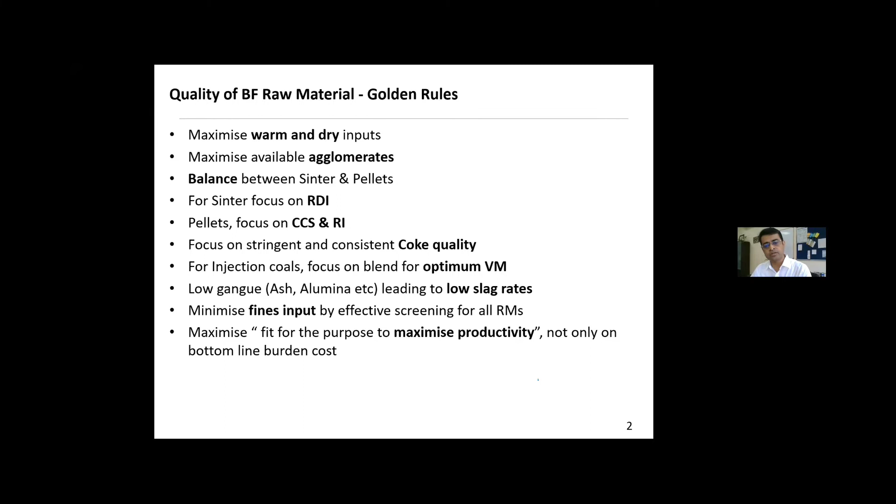For high driving blast furnaces, the raw material quality, especially the sinter RDI, the pellet strength, and the coke properties have to be very stringent and very consistent. We should all work on the gangue and fundamentally on fines reduction in the input to the blast furnaces.

The blast furnace requires the prepared burden to improve the productivity, and blast furnace needs a prepared burden to make the customer happy with lower hot metal silicon. So the overall verdict is very clear and loud that we, the iron makers, must see and listen and respond to the call. Else, we are out of the bunch.

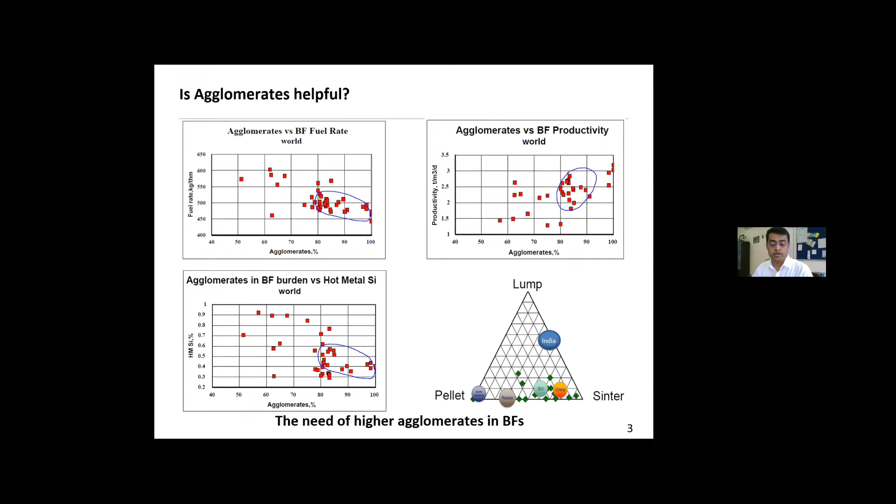If you see the triangle on the right hand corner, most of our Indian blast furnaces are on that blue dot. And most of the European and so-called the big blast furnaces, high efficient blast furnaces, are on the bottom below, where they are having a very minimal lumps and with a combination of pellets and sinter. So this is not good for the company, not good for India, and not a sustainable operation. So what next?

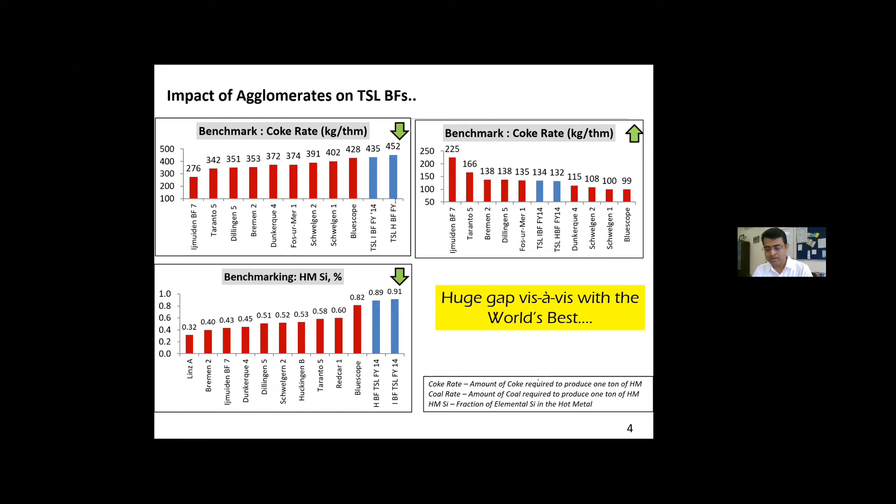It is not that their technology was superior, but that just the right mix of input material was not there with us to deliver the high energy efficiency, the productivity, and the quality that is required as of now. Coupled with operational excellence and with increase in agglomerates, all the three productivity levers, efficiency, and the quality parameters moved in the right direction. Just please have a note that none of the mentioned benchmark blast furnaces were operating with high alumina load like the Indian blast furnaces.

If you see the performance of the Indian blast furnaces or Tata Steel H and I furnaces, they are moving along with the bandwagon, a significant achievement with this adverse Indian raw material because of the alumina part. Just to mention, all these parameters are basically yearly best. But if you talk about the monthly best, one of the blast furnaces with us has reached a sub-300 coke rate, around 296. The coal injection, they have broken the barrier of 200. They have reached 221. And silica in the hot metal has dropped to less than 0.6, roughly 0.557.

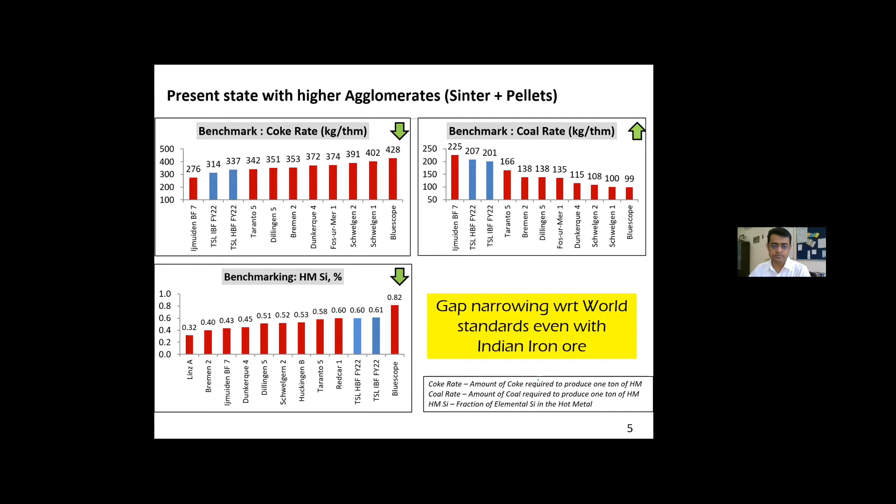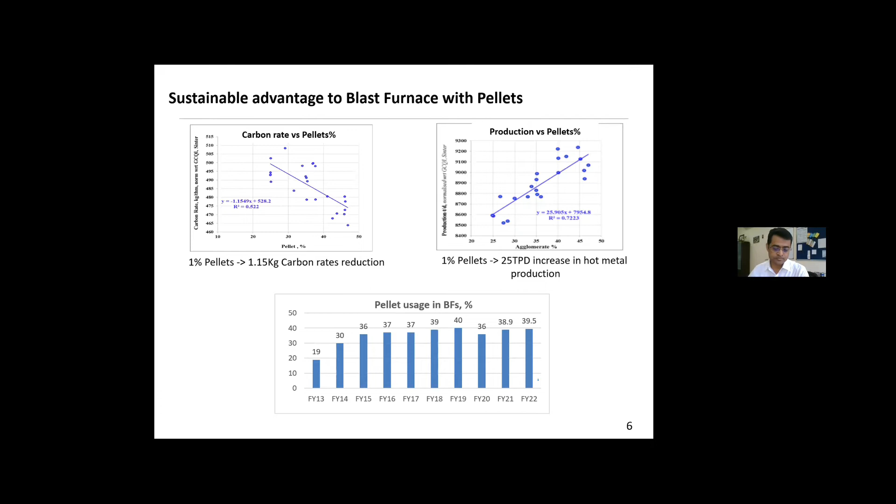Going further, we also have to think about how to digitize our own process. Because gone are the days of smaller pellet plants and variability in quality. With the very high running rates of blast furnaces, they require a very consistent quality and higher volumes. Therefore, the man dependency has to be moved into a corner where digitalization takes over the whole operations. So we at Tata Steel initiated the digital twin, where the entire pellet process from the raw material to the screening process is digitally mapped.

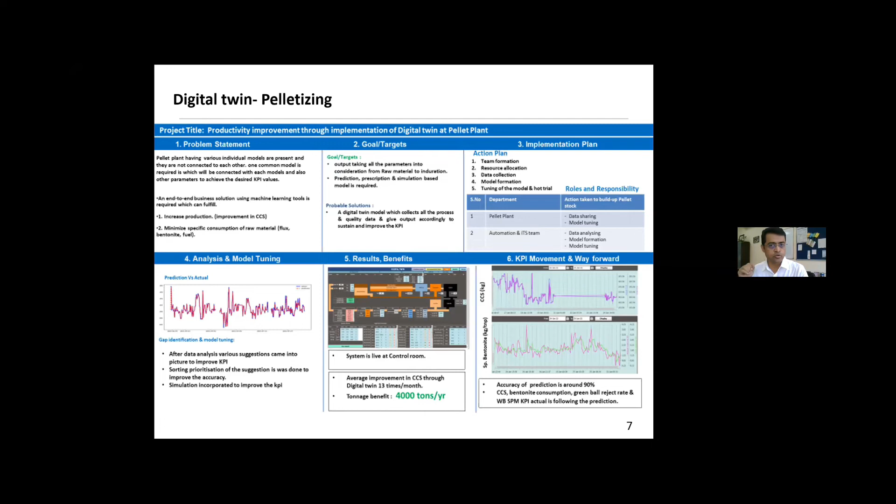You can also play with it to understand if you tweak one parameter, what will be the final effect on the quality. If you change the overall fuel rate, if you change the pressure, what will be the final output in the quality and the productivity. This is helping us a lot in stabilizing the quality, maximizing the productivity, and the blast furnace is also loving it.

Along with that, we say that the green pelletization or the green pellet making is a matter of art, but art varies from person to person, and the blast furnaces don't like it. So we try to do an auto operation of the green pelletization, so that we fundamentally ensure the repeatability of operations and consistency in quality.

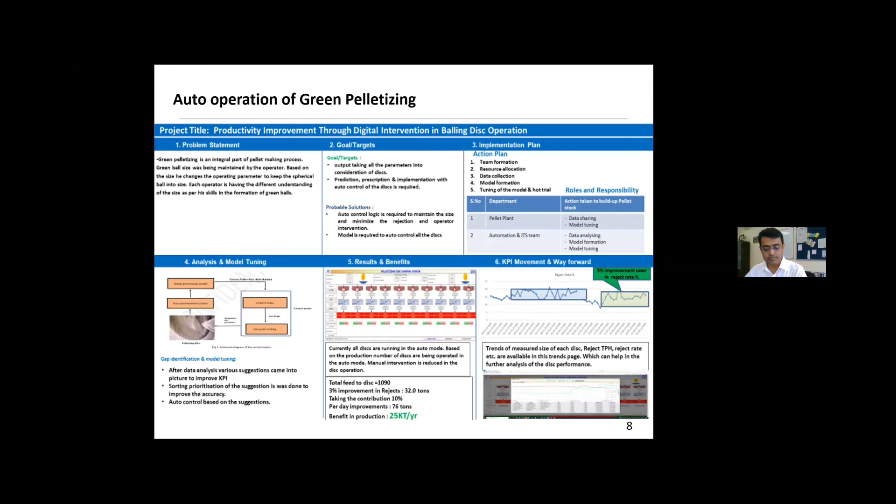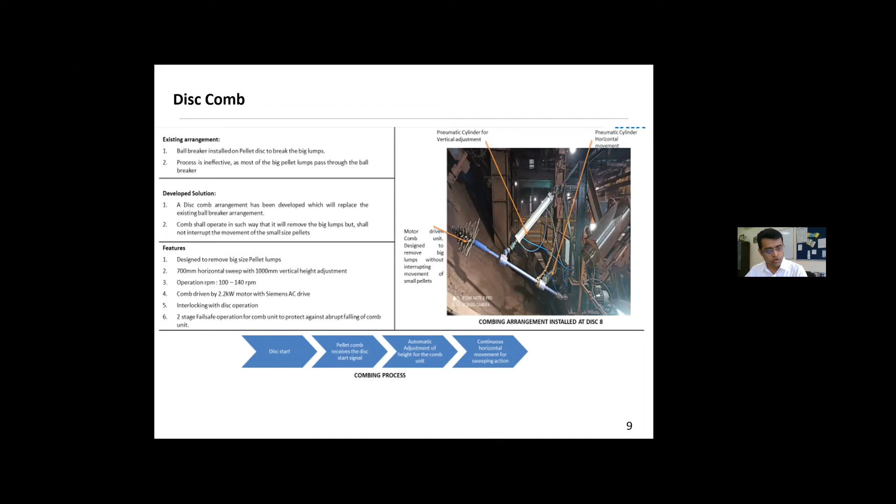This is a comb that we tried to incorporate. We all must have seen the elephant balls in our discs, and we also know the bad impact of it on the quality. But do you know how to remove it? This is a disc comb that we have designed indigenously with the fundamental principle of a comb, of combing out the elephant balls from the system. Fundamentally, it also improved the overall size quality and the shape factor of the pellets. And mind it, all these digital initiatives are totally homeborn, home initiated, and basically homemade.

As we pelletize, every disc has a different output, and there's a layering issue. The layering gives waviness. After that, it moves into the reciprocating conveyor, which also provides waviness. But the fundamental aspect of pellet quality and sinter quality is the bed profile, which is a fundamental determinant of pellet quality. Therefore, you have to maintain a very stable bed profile. If you measure, then only you can improve. So we put an index to this waviness number, based on the laser triangulation technique and image processing.

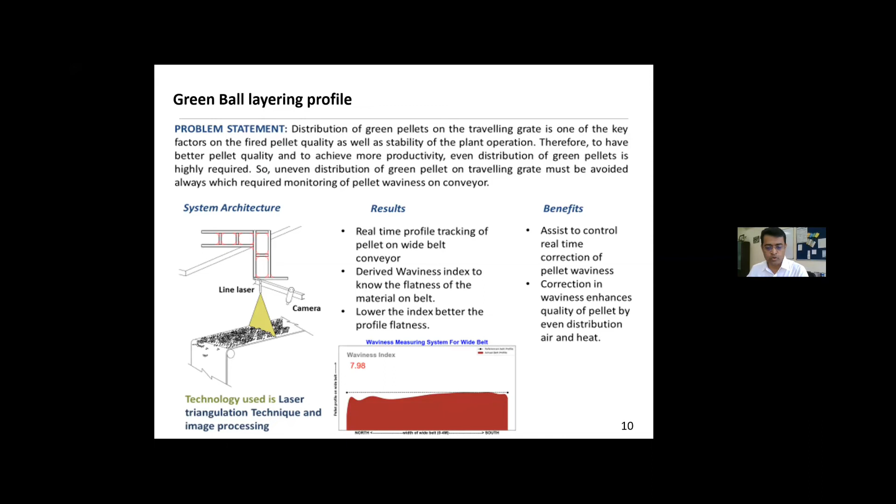With this, believe me, the bed profile in Tata pellet plant has almost become flat. And with that, we are having a much better and consistent pellet quality, because the overall heat input and the heat distribution in the pellet bed has really evened out.

Identifying the damaged grate bars in the long chain is very tedious, unsafe, and also unergonomic. All of us do it, although in a difficult way. Through image analysis, the damaged grate bars are identified, and the cars are also identified. So there is no manual intervention or person standing beside the machine to identify which car has which bad grate bars. Matching these two provides the operators with a matrix of changeable cars, eliminating long-time exposure to heat and dust, and the unergonomic way of monitoring it personally. This is done in-house.

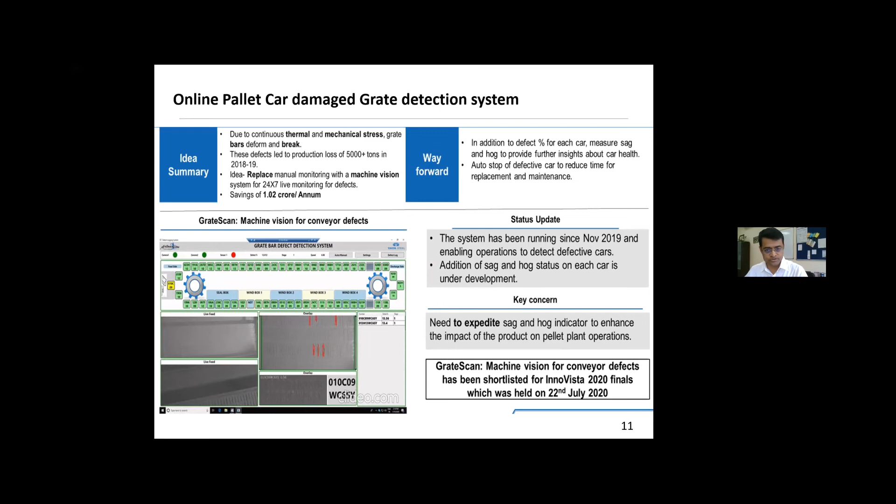Another important measurement is the sagging and the hogging. Hogging is what we call the bow shape of the pallet cars. I think Savala Sahab talked about it. How do you identify it? It's a long chain of around 300 pallet cars, and it takes a long time to monitor. Man vision is replaced by machine vision, and with artificial intelligence, image processing algorithms are run on a real-time basis to identify the sag and hog cars. This system provides visualization to the operators for sag and hog car identification, and finally the correction part.

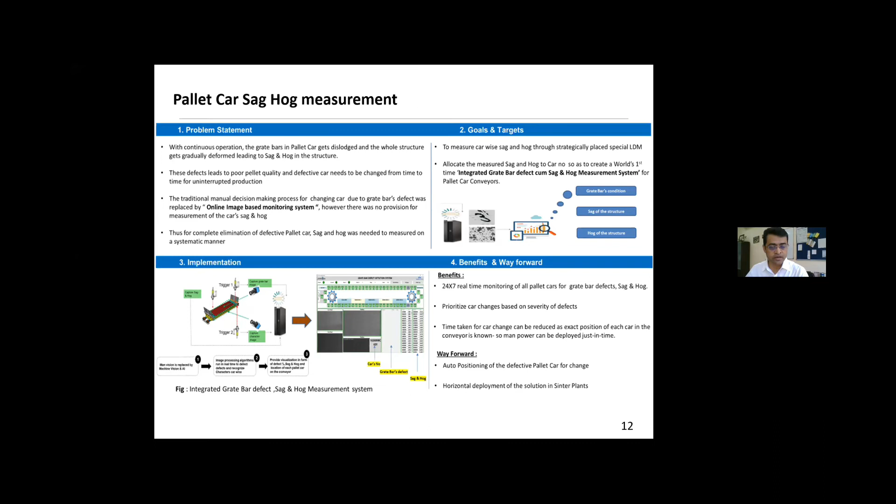The damaged cars we have identified need to be replaced, right? And this is non-productive work, because we lose production. Reducing the changing time improves productivity, so we have initiated auto positioning of the identified car in the right position at the right time, so that the change can happen instantaneously. After detection by the system I displayed, and once confirmation from the operator is ensured, the entire chain of cars stops in a particular position at the car changing station, so that the pallet car can be moved out. This saves time. We have moved from a much higher time to change to roughly 4 to 5 minutes.

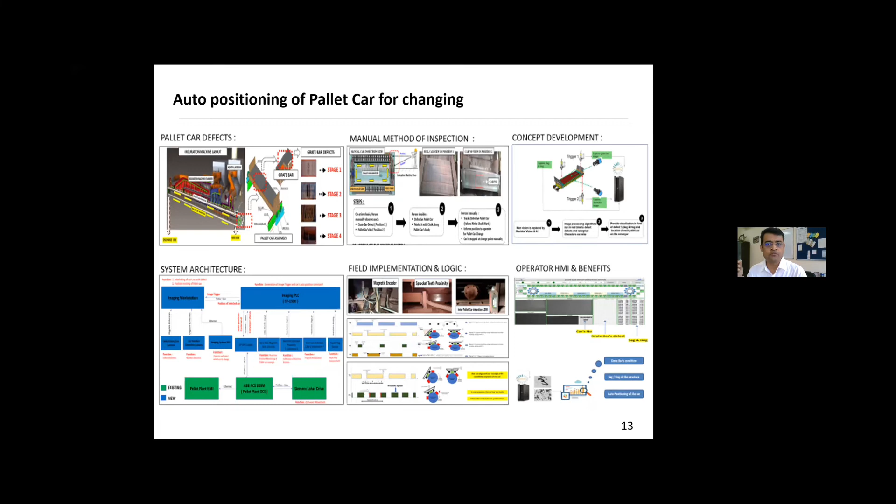This is a unique thing which we have developed in-house, purely in-house. We have talked about quality. We talked about CCS, the cold crushing strength. But all of us know it is basically a spot sample. We do it every 1 hour, 2 hours, depending upon our sample analysis.

This is the machine that we have devised, and it is an online measurement. The sampling from the belts, the screening to the right size, the positioning of the cam arrangement, the breaking activity, the recording of the readings, the disposal of the broken pellets into subsequent belts, and the availability of data in front of the control room, everything is manless. It is in full auto mode.

And therefore, you can see all the data, and in fact, the trend that you can see, there is no break. It is continuous data. It is not a spot 1 hour, 2 hours average.

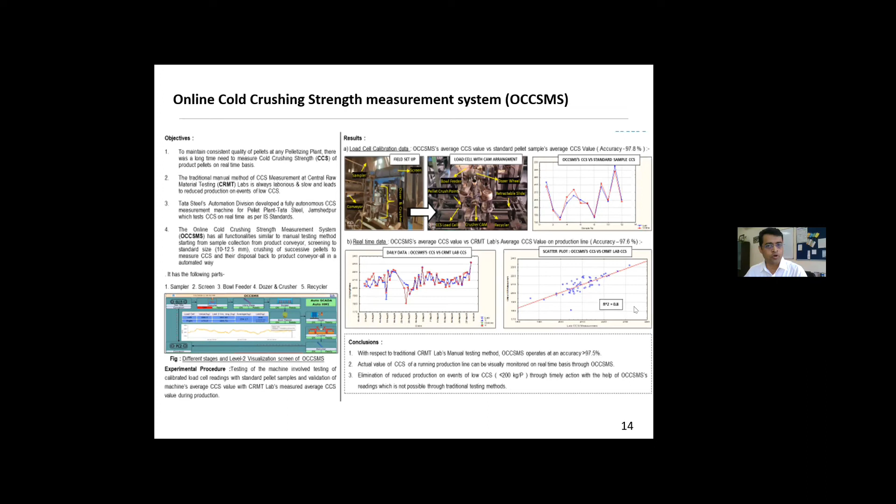Thus, I conclude that the positive impact of pellets on blast furnace operations, efficiency and stability, and the output quality is definitely established as of now. The adverse quality of high alumina, which is evident in sinter, is not there in pellet. Therefore, you should use more and more pellets.

With the usage of iron-bearing material and the carbon-bearing reverts from the steel plant, the pelletization operation is much more sustainable as of now. The transportability, the stackability, and the storability of pellets is unmatched. All of us know about it.

And looking forward, as you stabilize, as you grow big, the digital initiatives, the automation, the mechanization will help to stabilize the process further, to improve the process, make it more sustainable, agglomeration technology, to serve the blast furnace community and overall for the growth of the nation. Thank you.

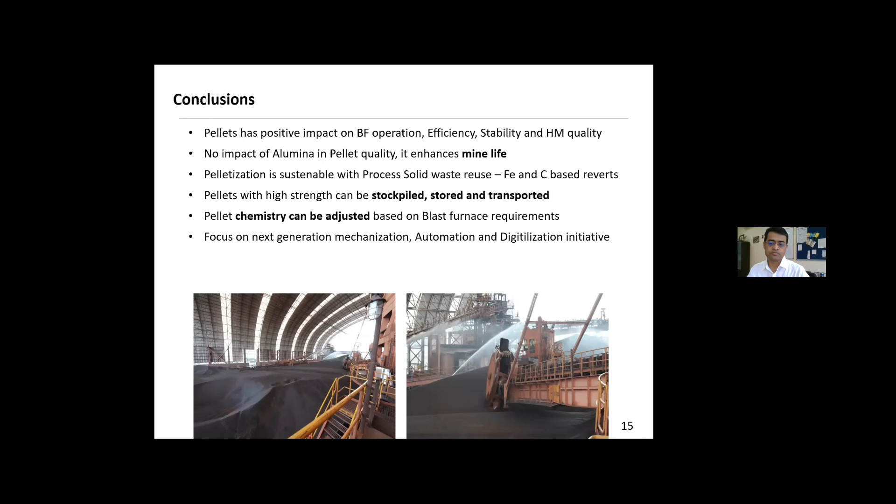Thank you very much, Mr. Indrajit Paul. I'm really delighted. I'm sure a lot of our participants would have enjoyed. I just saw a comment from JSPL pellet plant head, Mr. Brij Bhadra. He says it's an eye-opener presentation.

Really, I remember when I had just joined SAIL, Tata Steel used to say, we also make steel. But now I'll say Mr. Indrajit Paul type of people, they also open up. This is the beauty of technology.

He has told about 3 technologies which are being done, like the DISCOM he mentioned, the innovation about green ball layering profile, the pallet car automation. So all these are digitization methods, and I'm grateful, Indrajit, that you touched upon these, even though I know these are confidential in the sense that it is your initiative of Tata Steel.

But this is where our Ministry of Science and Technology used to say, somewhere we should have a horizontal transfer of technology. So Mr. Indrajit Paul has epitomized this by sharing all his digitization innovation. Thank you, sir. We are grateful.

In fact, Bhatnagar sir, all the digitalization initiatives that we have done are totally in-house. Therefore, the in-house talent is there with us, and because of this, the horizontal deployment of these technologies, as we will be initiating our next pellet plant in Kalinganagar, 6 million tons, sometime later this year. So all this learning from this pellet plant, all this automation, mechanization, and digitalization, will move there.